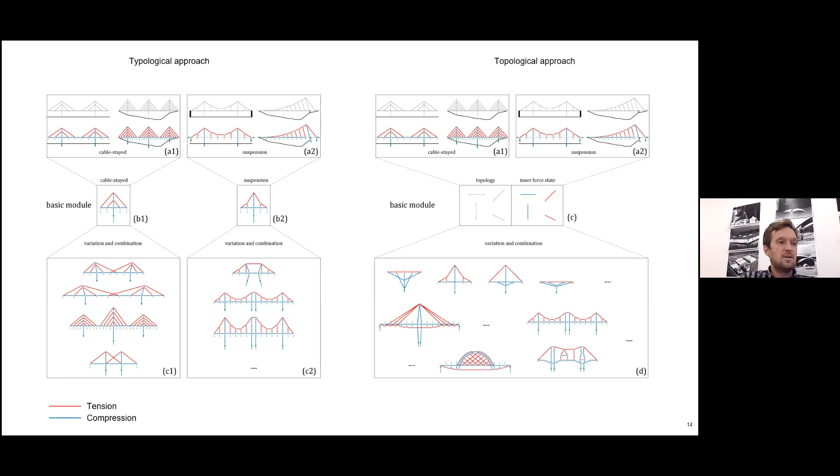And if you take these as the smallest module, the smallest unit, and start combining them, you get obviously a much richer playground of solutions. You can still describe a suspension bridge and a cable stayed bridge, but you start getting forms that possibly do not have a name yet. And if they are structurally informed, like in my research, they are also structurally sound to a certain degree.

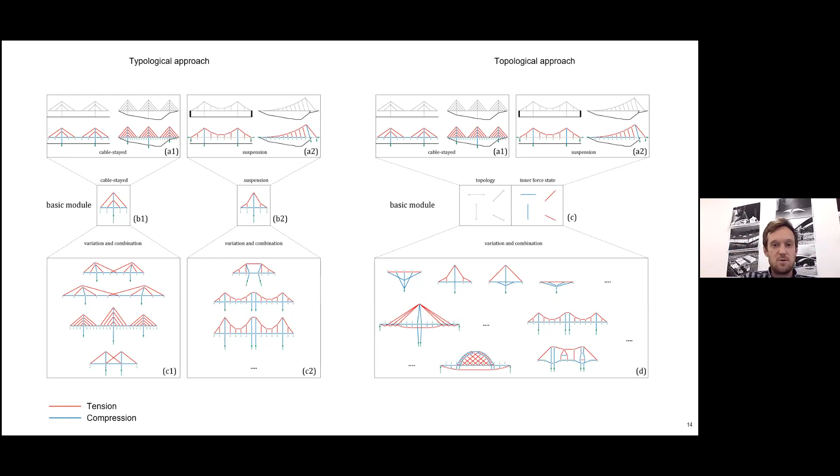So that is kind of the translation of this quote by Bill Addis: on the left side, the more conventional one that follows a recipe, and on the right side, if you really break it down to the smallest unit, you would rather start with compression and tension forces and combine them.

So extending it now even to computational structural design, I really want to quickly do a very personal bracket here. I want to quickly tell you how I approached computation and structural design. So this was my dream as an engineering student, that everything can be quantified, automatized, and optimized. As an engineering student, you have the feeling: why do the architects not formulate an objective and let an optimization solve the process? And this was really where I came from within my engineering background.

And my master thesis in 2013 reflected this very mechanical approach. So I took a station from Zaha Hadid that you see in number 1, the Hungerburgbahn in Innsbruck, and I parameterized it like reverse engineering. So I gave some degrees of freedom to the design of Zaha, and tried to show how the form could be structurally optimized, and then showed the Pareto optimum in between the design that came from the architect.

So the form was kind of ideal versus number 3, where the structure was ideal. And then obviously you can start interpolating between these two extreme solutions. So this was my master thesis in 2013, parametric setup, playing with the parameters, optimizing back and forth. And obviously there was something missing. The typical engineering task you see on the very left. So you get a given form, you make an analysis, and you optimize the cross section.

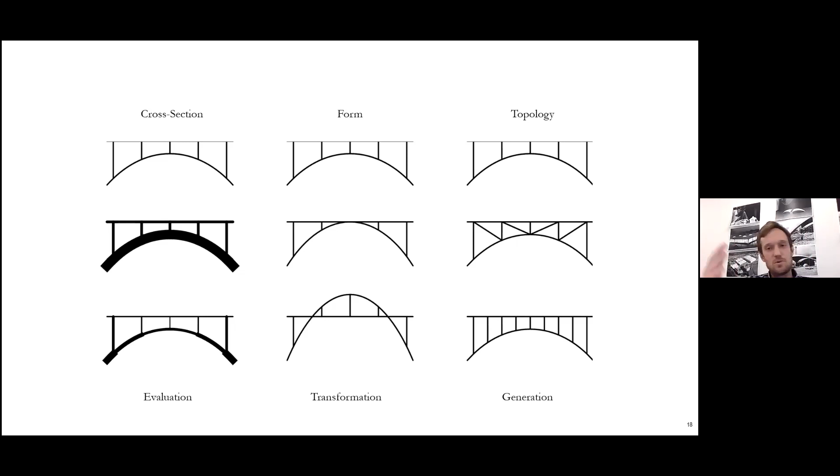In my master thesis, I was actually somewhere in the middle. So I started to interact with the form. I questioned the form of the architect and produced different variations. But actually it's clear that in the design process, you have to cover all the 3 different dimensions. So it was very important for me also to capture the topology, as we have seen already before. So after my master thesis, I really wanted to enter the realm of topology, so to say.

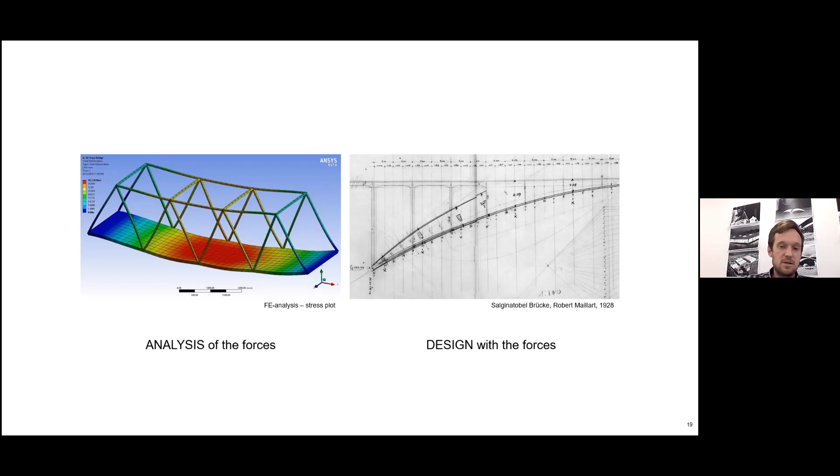And then I was also very lucky that I came to ETH, to this chair where I'm sitting right now, where we're not so much only interested in an analysis of the forces of a given form, but actually you really want to use the force as a design principle, as a starting point for the design. And that was a nice coincidence for me: the interest in computation, in form finding, in playing with the topology, all matched very well to the interest of the chair, which is graphic statics and strut-and-tie models. So to really control the force flow in a synthetic way.

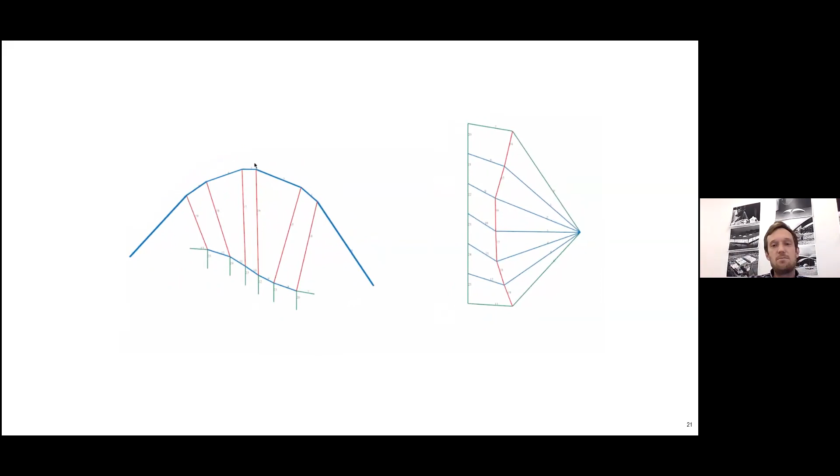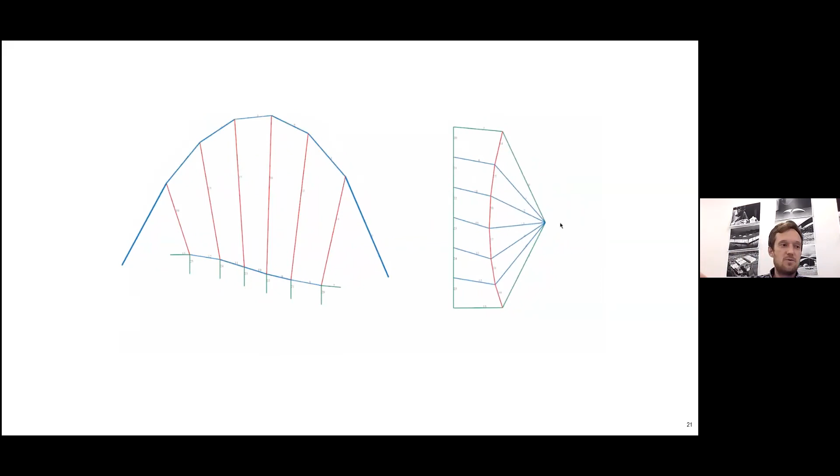And that is the research that I developed here at the chair together with colleagues. It's called combinatorial equilibrium modeling. Combinatorial because, as you have seen in some of the slides before, it's about combining forces in space. On the left, you see a form diagram, representing the form of the structure. On the right side, the force diagram. And you will be able to really explore different solutions in real time. So you're not in this feedback loop where you press a button and you wait. Ideally, you can really interact between those two different realms, form and forces.

And as I have said, the importance of topology and combinatorial was also very important. So ideally, my research opened up a playground in which you can, on the one hand, explore the topology, so you can start manipulating the connectivity, but also compression and tension. And then on the vertical axis, you also have the possibility to explore different metric solutions that fulfill different constraints, for example. So again, here we have this connection to lateral and vertical thinking: the lateral exploring mode, and the vertical mode in which you look for specific solutions once you have objectives, once you have clear constraints.

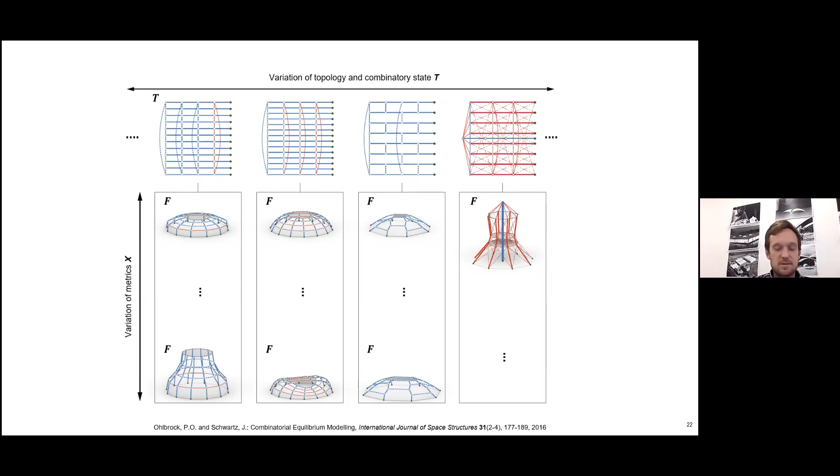So this was the starting point for my PhD. Here we see some technical peculiarities of the algorithm. So there are form finding techniques that can provide structures in equilibrium, but only at the end of the process will you have an equilibrium state, whereas the method that I developed, like the force density method, ensures that you will always have something in structural equilibrium.

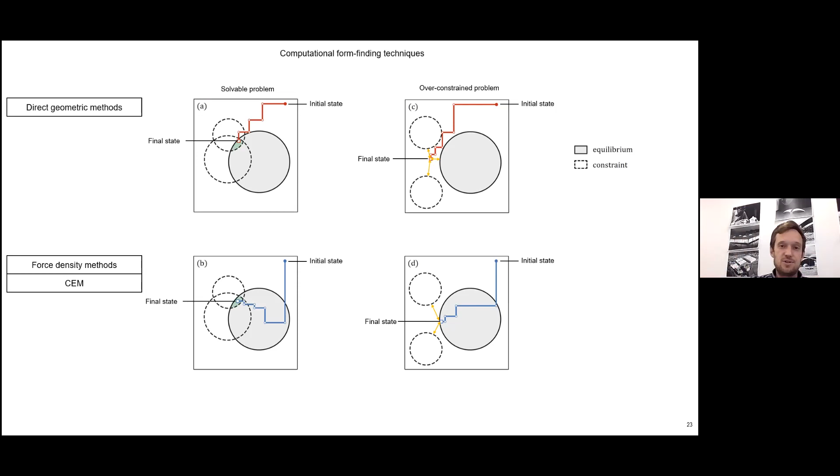So this is conceptually sometimes an advantage, because everything you see on your screen structurally has a certain value. And then obviously, if you have additional constraints, you need to also activate iterative procedures. So yeah, with the help of, as I said, of colleagues, we developed also tools.

This was the first release we did together with Pierluigi 1.5 years ago, a small Grasshopper script. Now, Rafael Pastrana, who is now in Princeton, actually developed the COMPAS CEM version. Very, very impressive what he did, and also extended it, or improved it, much nicer the way he scripted it, but also using automatic differentiation inside to speed up the optimization procedure.

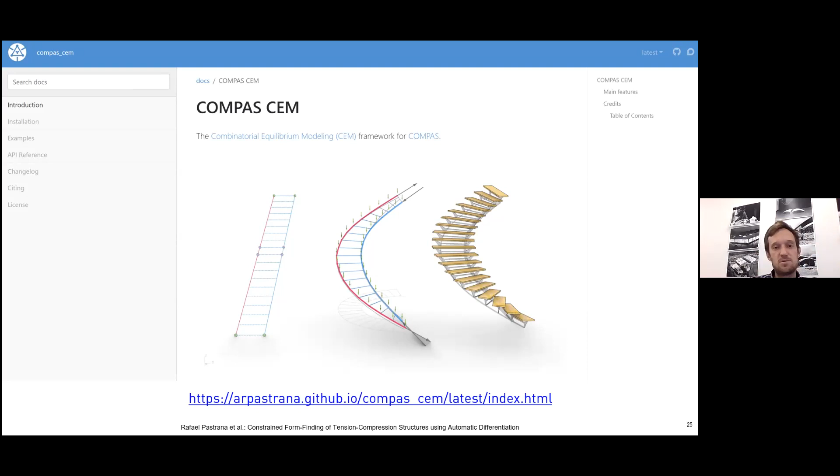Here you see a very small script that we used with students in our class here at ETH, architectural students, to design very quickly some small pedestrian footbridges. Yeah, very, very easy to use if the tool is properly introduced.

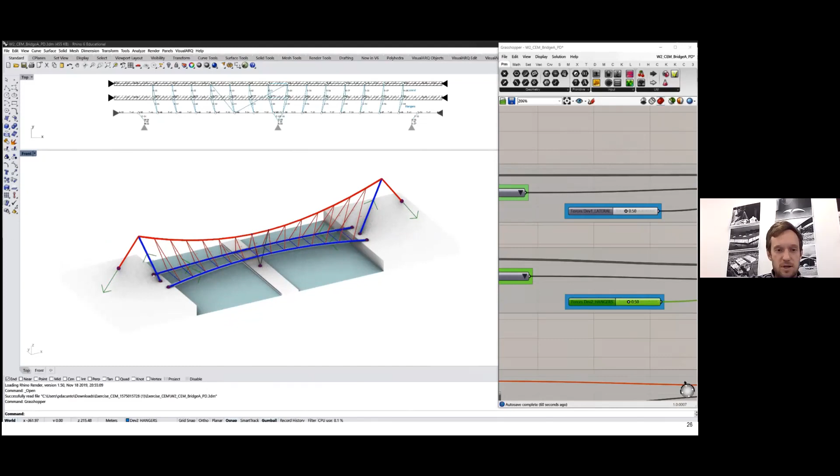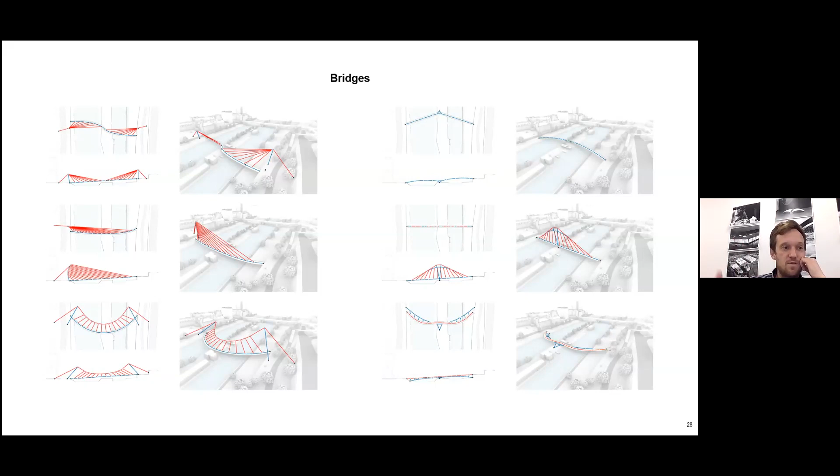Before I go more into, let's say, data-driven approaches, I quickly show some manual, more top-down experiments. So here, that is very conventionally how I used it in my PhD for the design of pedestrian bridges. So it is mainly like translating sketches into a proper form-finding result where you get the precise geometry.

And yeah, obviously you can apply this very same method and tool for very different contexts. Here we explored some different shell typologies. What happens if you start combining compression and tension in a shell structure and start playing with the parameters?

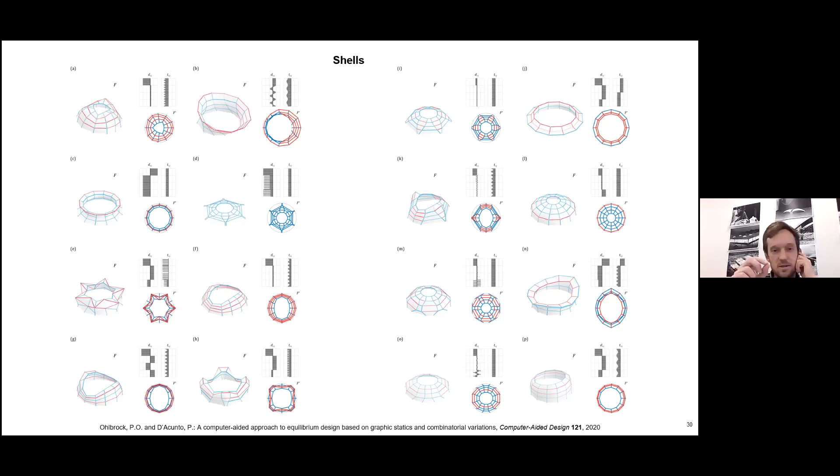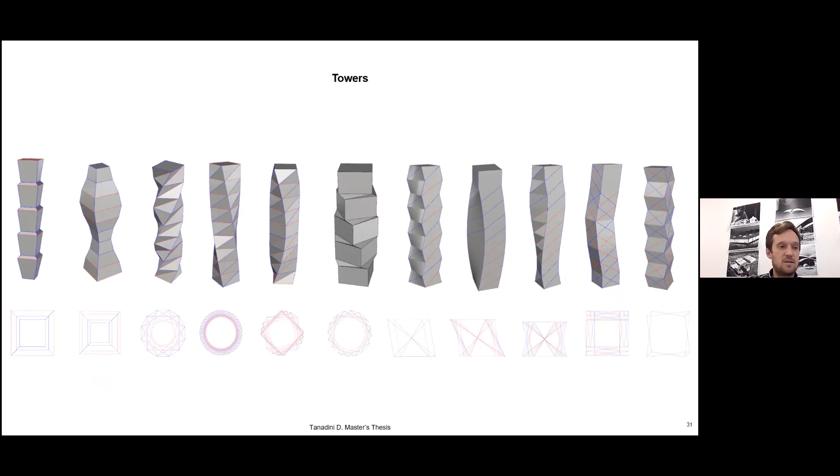Or also here, a master thesis by Davide Tanadini, who's now a colleague, that designed these towers not by actively manipulating the geometry, but really by precisely playing with the forces. And out of this force constellation, actually, he managed to get this very rich diversity of shapes.

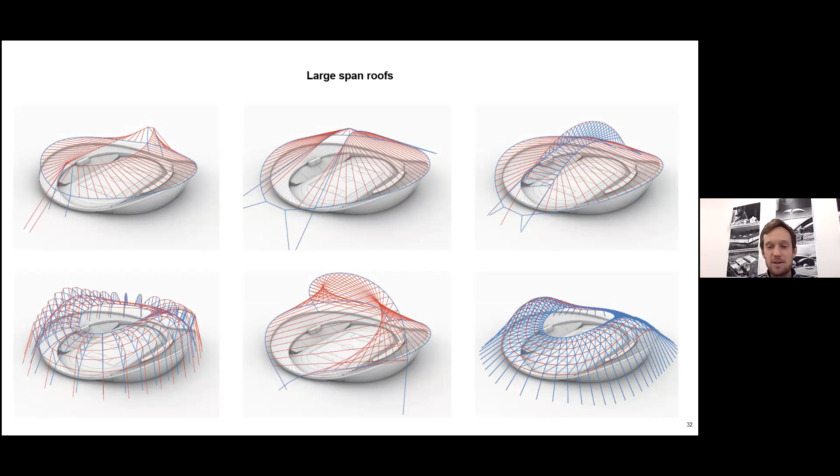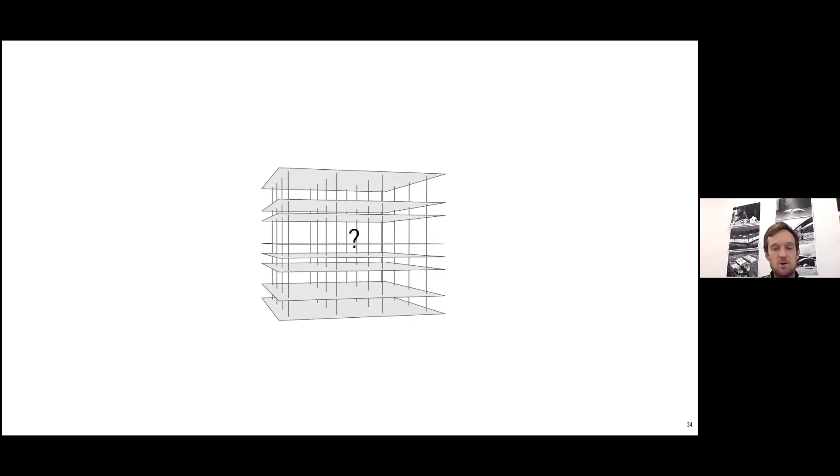Large span roofs are also a nice, let's say, building typology in which you can apply these form-finding techniques. This was a stadium competition we did together with Pierluigi and Lukas Ingold in 2016. But obviously it was also always the idea of us here at the chair that we're an interface between architecture and engineering. How can we apply these methods also to more, let's say, conventional architectural questions, so multi-story buildings?

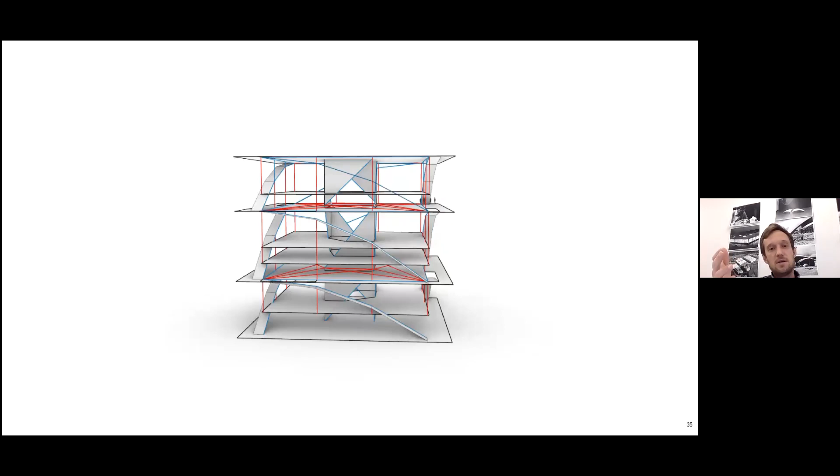And you see that if you start activating, for example, forces within the slab, you can start to make the columns take certain shapes, create certain spatial arrangements. You can start to create column-free spaces and so on. And this is a very powerful way of looking at architecture and engineering at the same time.

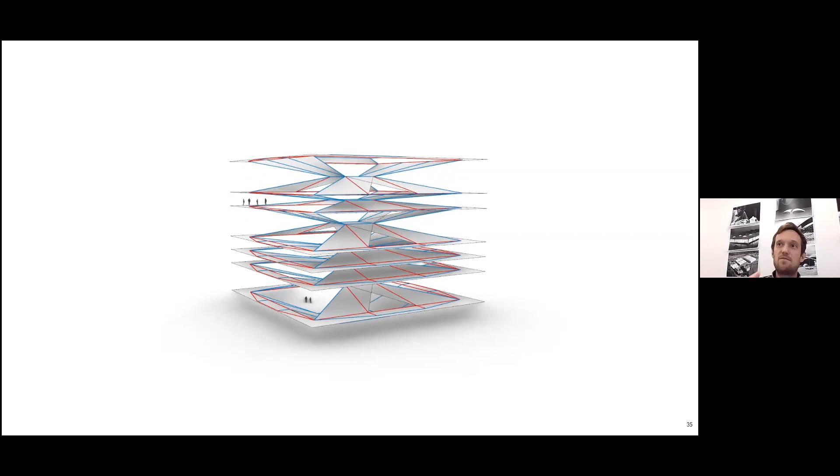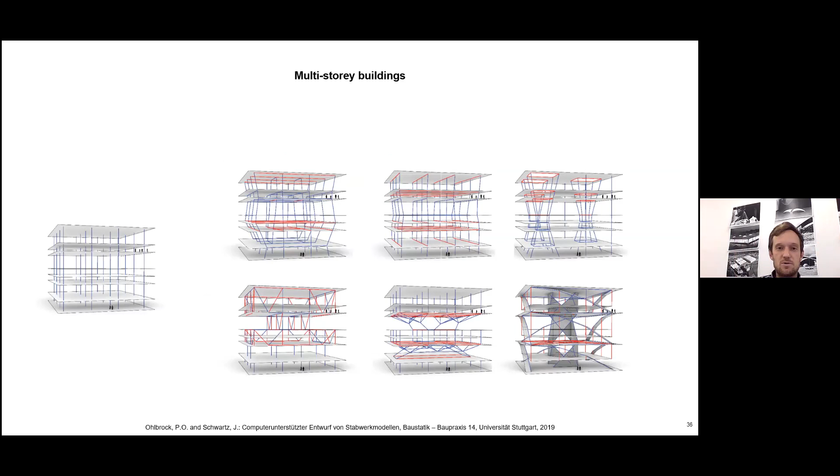So these models here are not very detailed, but they reflect from the very first moment how the loads will be transferred within the building, and can give very nice ideas in which direction to go. So yeah, I mean, now we have this algorithm, this plugin that can very quickly generate equilibrium models. And at some point it was clear that we wanted to open Pandora's box, kind of.

So one of the first examples, to continue with the same context, was to think of an automatic building generator. So you have certain things that can be varied. So for example, number of floors, floor heights, different patterns. And if you let this run, you can very quickly generate very different building schemes, where the structural load transfer is controlled from the very beginning.

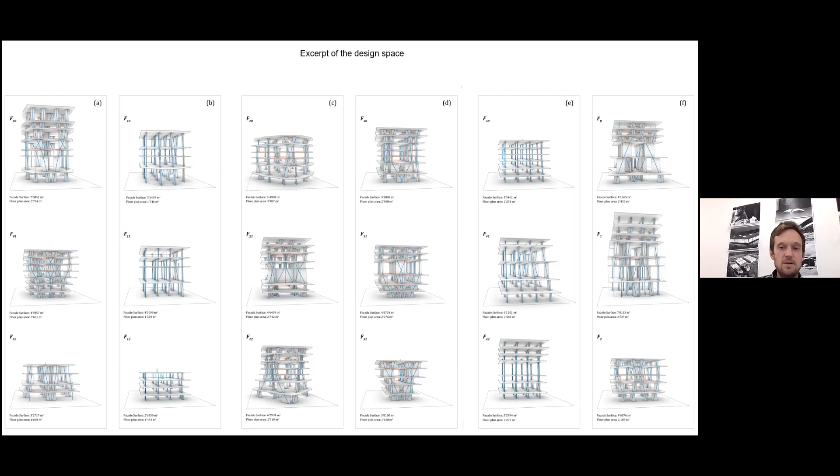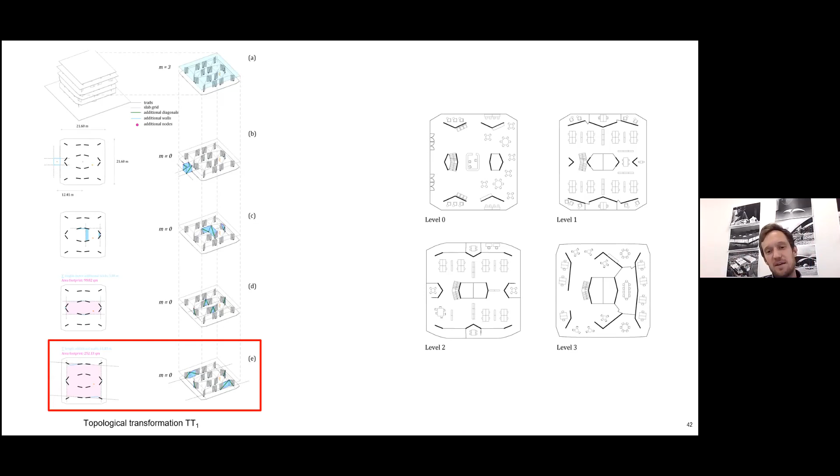You get different criteria, you can pick one, and then obviously you also get other performance criteria like daylight or lateral stability and so on. And what is quite nice is that from the very first moment, you kind of now create floor plans through a structural pattern, which is maybe also a bit questionable, because most architects don't want to give away the control of the spatial arrangement. But nevertheless, it was a very interesting experiment to do.

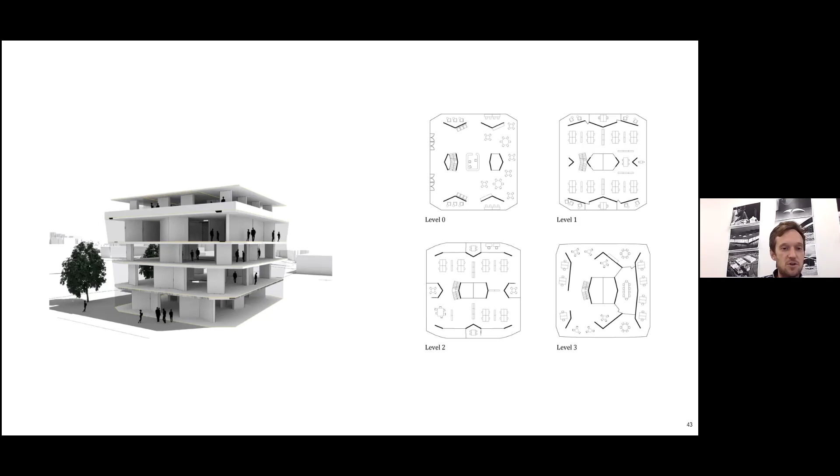And you see that all of a sudden you can create buildings where the walls don't necessarily have to stand on top of each other, but the building as a whole still makes sense. And you create these very beautiful open floor plans.

Yes. So as I've said, now I want to come more to the experiment section, and in that regard also look into more aspects that are, I guess, closer to the Design++ initiative. And in that case, we have this dilemma that I already mentioned, that on the one hand, we're now having very powerful mathematical tools and scripts and algorithms, but architectural design can rarely be stated with explicit objective functions, and therefore is not open to be optimized in a traditional sense. The evaluation criteria and the design objectives often co-evolve with the development of a project.

So far, very often, computation is very powerful in a very narrow setup. You can optimize if you have a very clear idea of where you want to go, but in a very early design stage, in which I'm particularly interested, it's still very difficult to apply conventional optimization. The other extreme would be to say, okay, we can generate a lot of different solutions, and now we present each individual in a large population at each generation to the designer, but this very likely will not make sense either, because the designer will get very tired, and he cannot look at 10,000 different solutions.

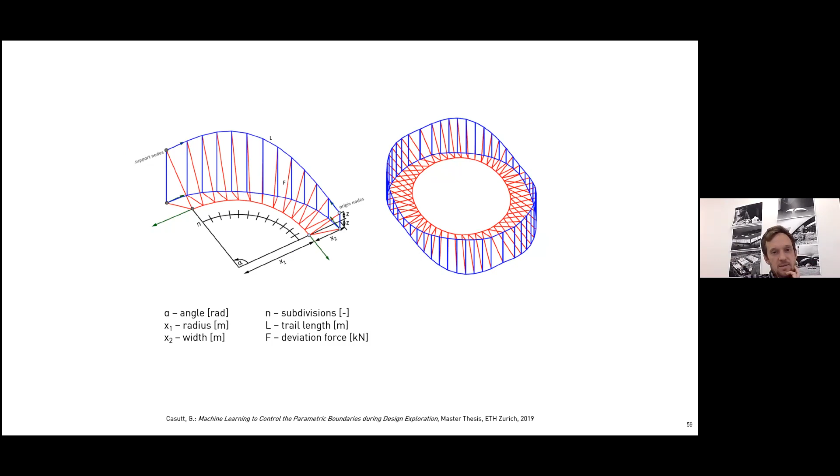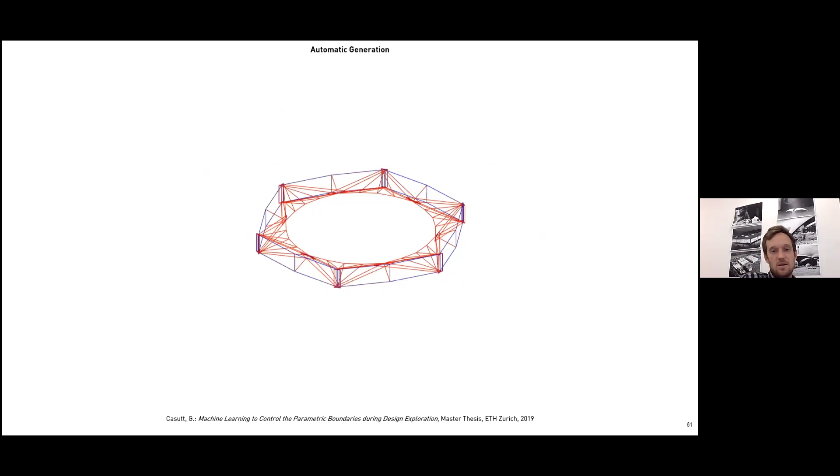Another example that we tested here was the self-stressed stadium wheels. So just to show you some different experiments that we did. And in that case, we produced a lot of different solutions, again, keeping the topology the same, but exploring the richness of solutions within the same topology. So all these wheels are self-stressed, like a bicycle wheel or a roof for a baseball or football stadium. And again, we used the same ideas as before.

At some point, we had the idea also with Vahid not only to cluster the different solutions based on mean values or absolute values, but also to introduce higher order statistics. So to have a closer look at the distribution of the different parameters within the solution to get a more precise overview.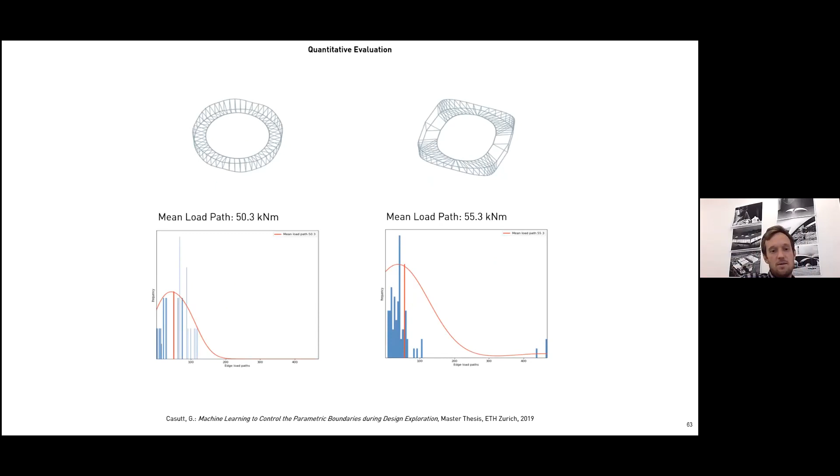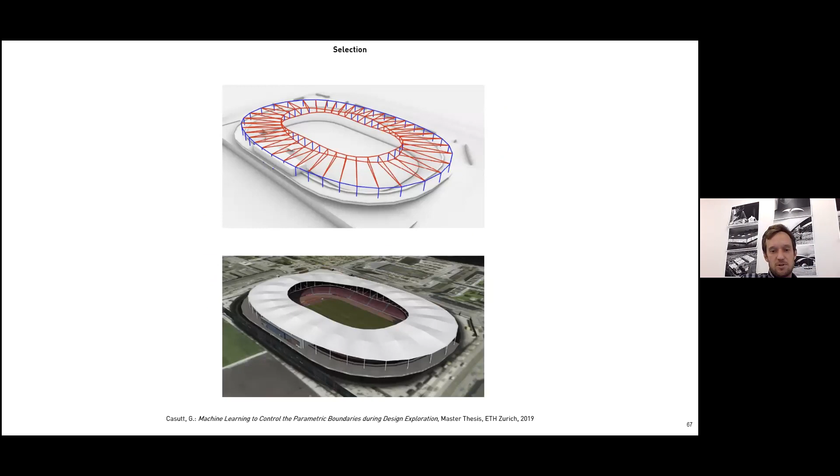So in that first phase, we generated 1,000 different solutions. We used the self-organizing map to cluster the solutions to get more an essence of the solution space, so we don't have to look at each solution, and we also don't have to optimize because we don't know the objective yet.

So in that case, actually, we worked together again with Carla and Vahid and Pierluigi, and we borrowed this very standardized framework from a work of Rivka Oxman, where you usually have in a design process, or also in a computational design process, at some point a generative step in which you generate different solutions, different alternatives.

You have a quantitative evaluation and filtering. So you can directly discard, for whatever reasons, a certain percentage of solutions. Then you have a clustering, possibly. And then at some point, there will be also a qualitative evaluation. And all these steps can either be performed by a human or by a machine. I mean, this is really, at the end, open to discussion.

Very classically, the human is probably the one that is the best in step D. But as I said, it's a very generic definition of a computational design process. And then obviously, once the designer or the machine has selected something, you can also start regenerating the solutions that are promising and enter this iterative process and connect the different steps as you want.

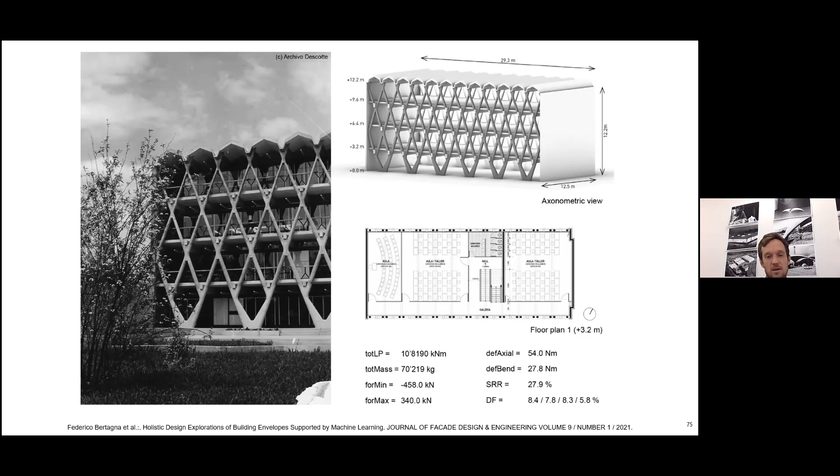So in that case here, together with Federico, who's another colleague of mine, we applied more or less the same workflow to the design of facades that are, on the one hand, providing the structure. So the force transfer, they're not only carrying their self-weight, but they're also carrying parts of the slab. And these skeletons ideally can also serve as a solar shading device. Even if they're very narrow in that case, you will see later on that you can also use them. That's actually the PhD topic of Federico, to activate the structure, also becoming a passive shading device.

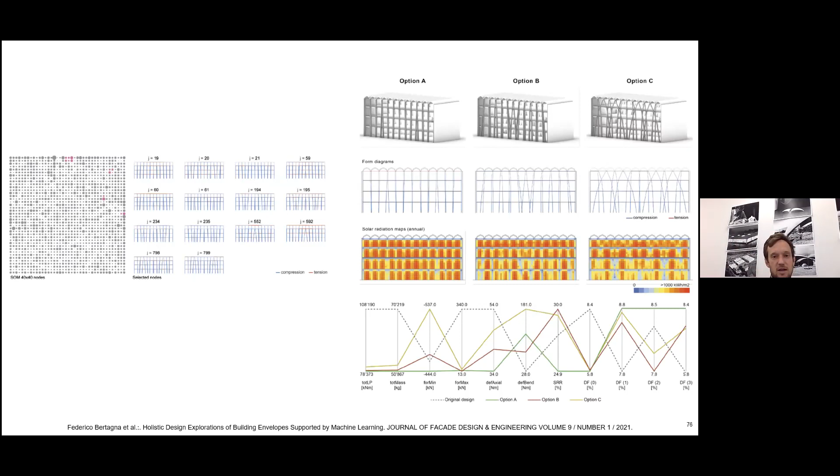And you see that you can obviously enrich the information that you capture in your vectors. You don't only capture structural performance criteria, but you can also put in there other performance criteria like the solar radiation map and so on. So this was one test we did, and then we actually tried to go a little bit more crazy. So we took a reference of the Christian Kerez design competition for Swiss Re some years ago.

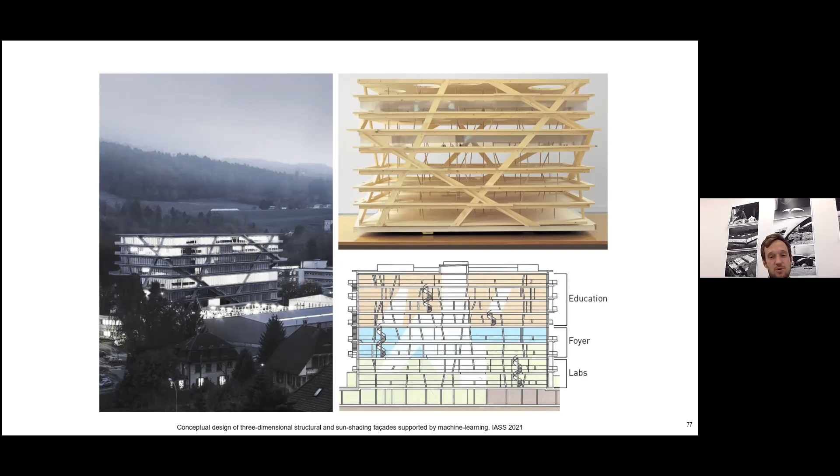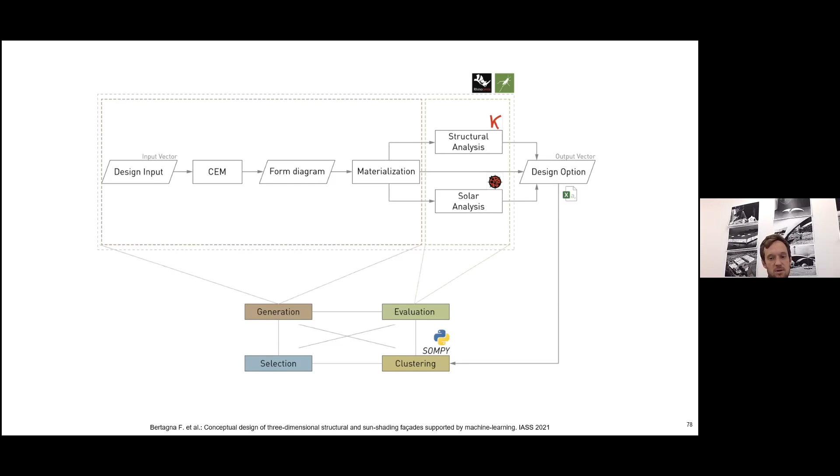And here again, a little bit the workflow behind. So there is a certain input. We translate it into a first form. This form we can materialize, give different thicknesses and so on. We can do a secondary structural analysis to check other effects that are not captured in the form finding. We can do solar analysis in that case with Ladybug, and we put everything in a vector. And for this vector we then actually used SOMPY libraries to do the clustering and the rest of the process within a Jupyter notebook. And here you see some interesting results.

I mean, again, you can argue that at the end the designer sees eventually surprising results, not only in terms of the formal aspect, but also in the way the structure and the solar shading performs. And this is obviously one of the main arguments at the moment to use also computation, that you can improve the decision making, and to give a designer more information as synthetic as possible

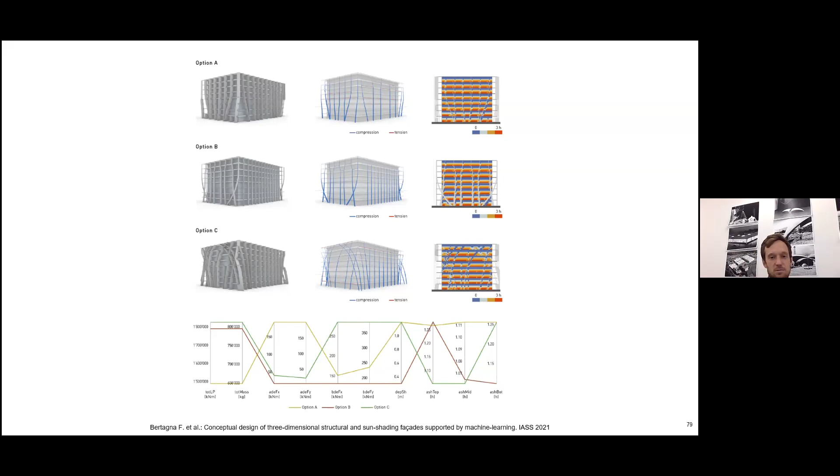at his hand. And the last one that we actually also want to show here is we used more or less again the same principles in the context of reusing elements. Here we work together with Jan Brütting, who's an expert in reusing structure elements, and we used again this CEM to do the form finding.

We used on the way in between some stock assignment algorithms to optimize the assignment process or to minimize the greenhouse gas. But at the end, it's always about variety, about showing a designer different options, but also showing him the consequences behind in terms of quantity. And I think this is actually what we are trying to do here.

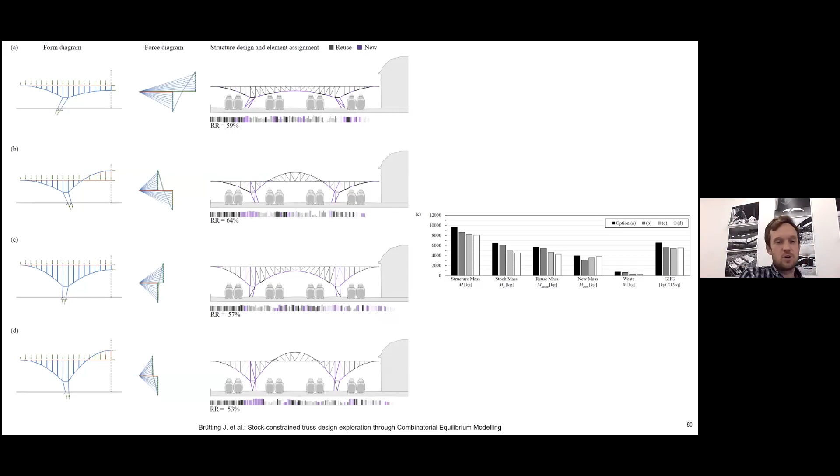So, my personal observations in that field, within data modeling in the context of early stage structural design. Most of the data that we were looking at is actually self-generated. So we were not looking at existing bridges and then extracting something, but we took, as you've seen, always this form finding engine as a starting point to produce different solutions.

And usually a top-down inspired process often leads to very predictable and self-similar designs. So you can really use it to narrow down to find a specific solution. On the other hand, a bottom-up process in which you keep everything open and you make more a rule-based process leads very often to very chaotic and noisy solutions that very often are not useful in an overall context.

And that is a bit the dilemma that I was confronted with very often, that we had many discussions. On the one hand, we wanted to also see something, let's say, new or surprising, but on the other hand, it should also look to a certain degree meaningful.

And if you don't describe the geometry, but describe the structural logic, you have actually another layer in between that you have to pre-think. And this is what I wrote in the second sentence, that actually brain work and also creativity is needed to formulate, to parameterize the problem in order to get many meaningful yet diverse solutions, which then also can be interpolated. And here, one of the questions that I also have is if this parameterization is always case sensitive, or if there is maybe a way also to make it more general.